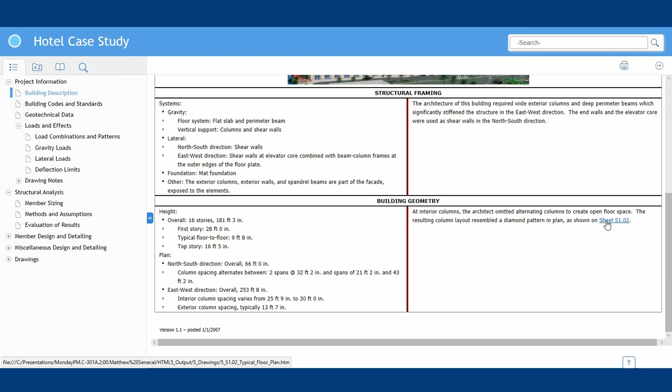And we did lots of nice links in here too. So if we're talking about building geometry right off and you wanted to get a good idea of it, it takes you right here to the floor plan. And to make this nice, you've got a floor plan, you can click on the plan and then it'll blow up and you can take a look around. So it's a nice little tool to help you quickly get around, to get a sense of the building as you're going through and visualizing the design, visualizing what's happening with this structure.

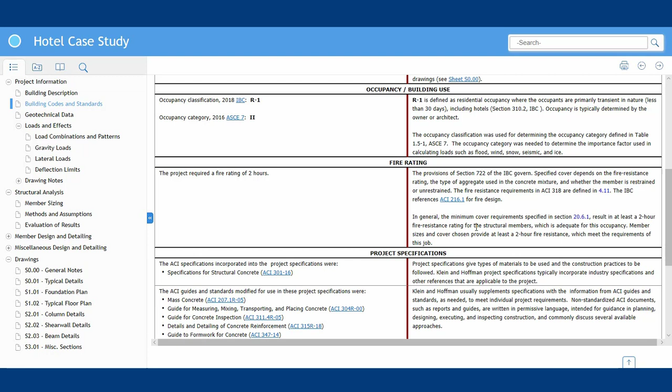So anyways, that's one thing you have to think about. The architect, by those occupancy ratings, has to come up with a fire rating. For this particular structure, a 2-hour fire rating was necessary. Well, inherently in ACI 318, you get about a 2-hour rating. Those are things that you don't learn, right? You kind of explore those things on your own. But it's good to crack open 216 every once in a while and see what cover gets you, so you get a feel for what just a natural design will give you when you approach a structure.

Once again, that's what this whole process was about. I don't get into too much project specifications in these. That's almost another whole topic, I could have had another 100 slides to get through job specifications, but it does help you along with drawing notes.

When I got started out there, I worked for really small firms, on really small buildings. I never wrote a set of project specifications until I went to another firm and started doing larger structures. Everything was notes on drawings, and that was just fine for small structures. It works really well.

ACI 301, which is the concrete specification we have here, is a reference spec. It's very simple to write a concrete spec on a set of drawing notes if you use the mandatory checklists in the back of that document.

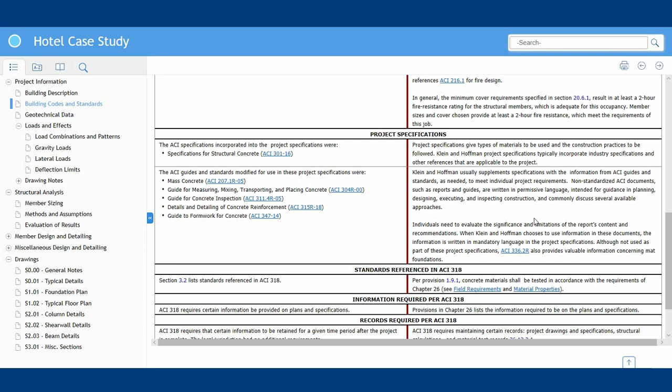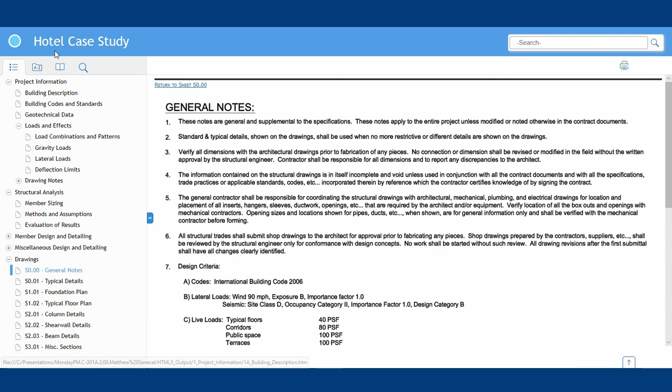Basically, most sets of notes that you'll see on a drawing—let me go on down here to general notes. Here's a notes sheet, we got some general notes. Let's see, we got concrete notes. Let me go back one. Got concrete notes. You see these little notes you put on drawings?

How did they get those notes? Where did those come from? Why are these so special? And why aren't they just in a set of project specifications?

Most places I ever worked, someone in the office was designated the concrete person, and they found that magic thing called ACI 301. They learned about checklists in the back of that reference specification, and they started answering those questions in the back of the document. As they answered those questions, they wrote them on the notes. That's pretty much how most people arrive at the notes on job drawings.

And then you'll have an architect that comes along and says, I need a set of project specs—would you do the material specs for me, please? And then that would be another seminar you need to go to.

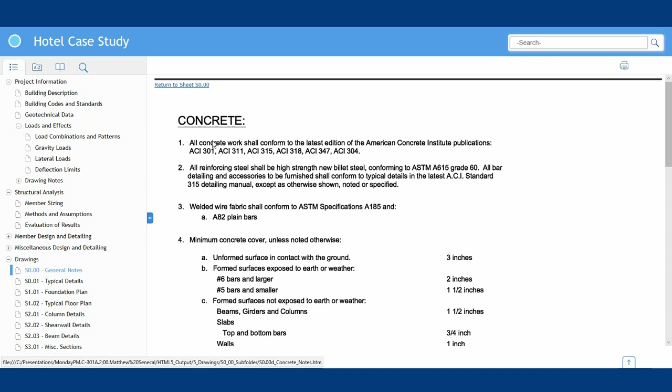Another thing you collect is geotechnical data. You need some of that information in order to complete your loads, to understand the analysis you're going to accomplish, so we have a little section on that.

We get into loads and effects, the load combinations, patterns. You'll start to see as we get to this point in the project, I put in little links or drop downs to ACI 318-14. 19's not out yet. I updated this from 318-05 to 14 because that was the last time I worked with this.

The structure was actually built under 318-05, but many of the requirements are the same, and I updated them, all except for wind. I had too many graphics in there that had to do with wind design, the numbers and stuff. But what's interesting about wind?

Young professionals, what happened between ASCE 7-05 and ASCE 7-10? Can anyone tell me? Yeah, ultimate load, right. So we went from 1.6 times the wind load to 1.0 times the wind load. You know what the difference is? 1.6.

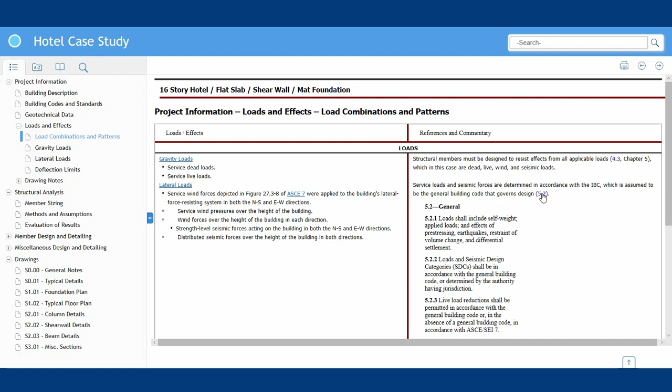There's no mystery, they didn't reformulate everything. They did provide a bit more information on lots of other things, other structures and things like that. They did do a lot of improvements, but the basic wind design is 1.6. So if you saw a service load design from the early 2000s, just multiply it by 1.6, and now you're at ultimate load, and you're good to go. That's the short version of many long wind things you'll go to.

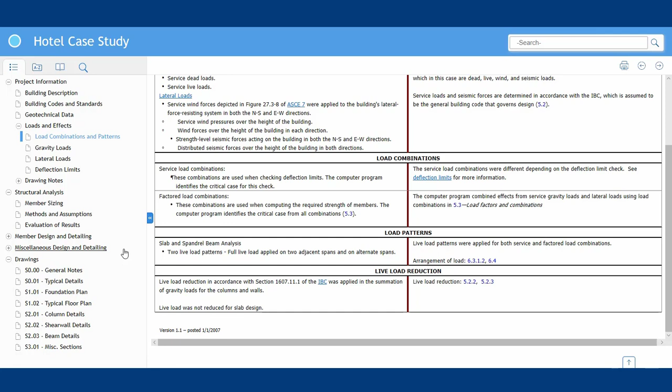So anyways, we talk about load combinations, patterns, how you move your live loads around—alternating live loads, two spans together, every other span, checkered span, on floors checkered, alternating live loads—that stuff is in here with a little information. You can pop down and read it, or have your 318 open and read along to see the full picture instead of just the individual requirements.

A lot of these code requirements—I'm just putting a little fear into you—had a lot of fluff in our equations because we were designing by hand not too long ago, or with very simple first order analysis matrix type designs. So when we were assembling the process in which we go to do design, we're basing that on these more simplistic methods of analysis.

We had some wiggle room when we designed a frame in one direction, then a frame in another way. We didn't have the full 3D effect before. But as time has gone along and we get more dependent on computers, and get closer to actual values in the column, we now do a full 3D analysis with a corner column. I get nervous sometimes that we're cutting it a little too close on our corner column designs. We have to really think about how close we're getting to the actual loads and values in the equations in ACI 318.

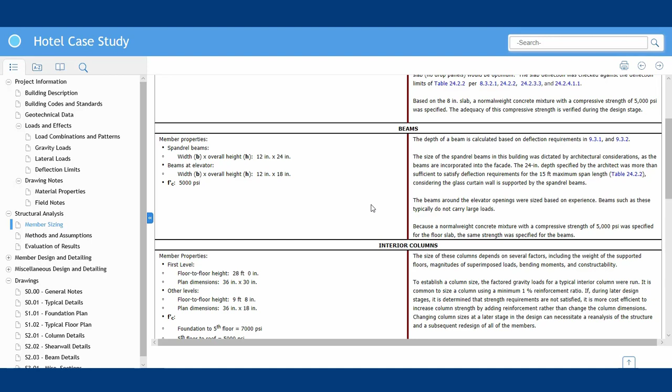It's getting better and better though, by the way. Those forms are getting more adjustable, more reusable. These are all things you start to pick up over time, and hopefully the more experienced engineers in the office help guide you along.

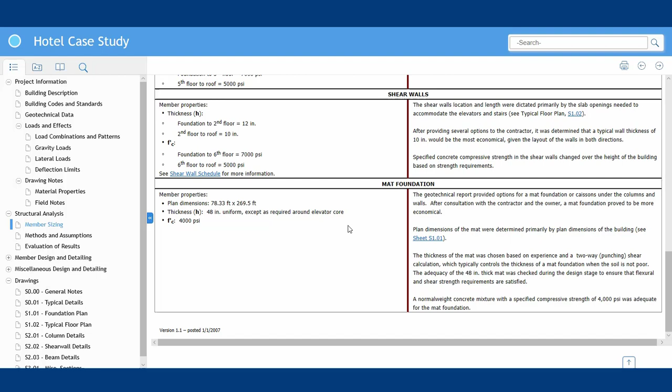But this page right here talks about initial member sizing, because we need initial member sizing to run our analysis. We need to put some sizes into our computer program. How do I arrive at those?

That's right here—they used a finite element analysis for this, and finite element analysis is addressed in 318.14. They put a little section in there saying yes, finite element is good for everything: first order analysis, second order analysis, nonlinear elastic analysis. But at least they're starting to talk about it.

What I hope over time is they start to provide us a little more guidance in the code, especially when it comes to things like flat plates, where we're collecting a lot of forces across a strip and getting super high stress concentrations, particularly at our columns or something like that. How do I normalize that? What happens if the stresses just seem oddly high?

How can I mitigate that? How can I feel comfortable that what I'm looking at makes sense—that I can just normalize, add up all those moments, divide, and get an average value? How can I do that? So hopefully we'll get a little more direction in our guides and in the code going forward. But at least we're now even saying that it exists, which has existed for a very long time.

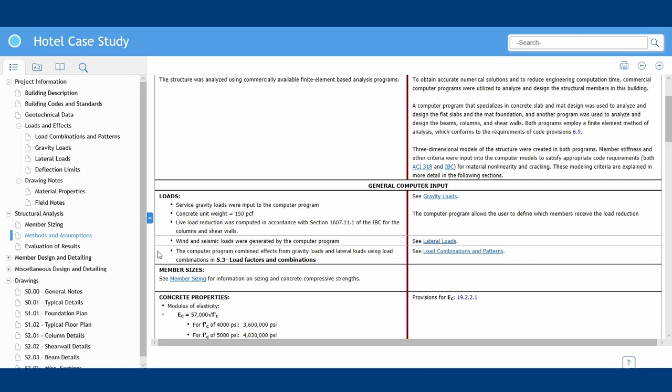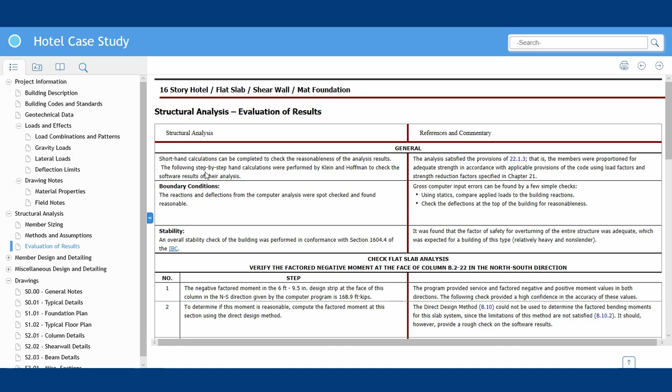We go along, and I was talking about evaluation of results, using Chapter 6 to evaluate your computer program. We have a whole section here called Evaluation of Results that does just that. So here we have this very odd floor plan—very long spans, very short spans, flat plate, columns in a diamond pattern. Let's see if I can show this quickly.

So in here, the computer program gave us 170 kip-feet. Then I just use the direct design method—I just ignore the fact that I don't meet its requirements. So it may not give me a safe design, but it should let me know whether or not my computer analysis is making sense. I might be just outside the values I'd normally get. I wouldn't use them for design, but I should be close to the values.

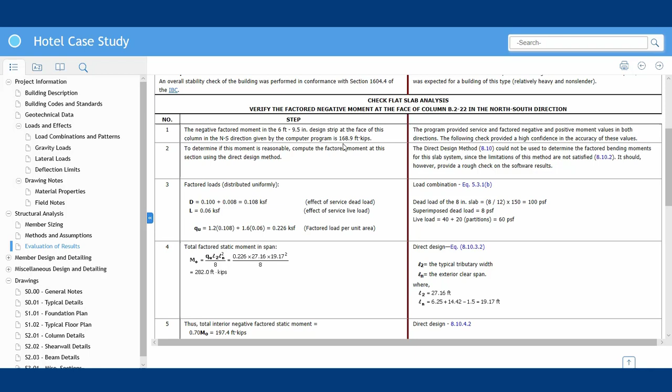As you come down here, you come up with 148 kip-feet. So 148 from my hand calc versus 170 from the computer. So I can say with some reasonableness that this odd thing I'm looking at with an FEM analysis is giving me something in the realm of possibility. So we have tools out there—these old tools are there for us, and they're in the code. You don't have to go that far to find them.

So then after we get through all this upfront stuff—and I spent a lot of time on it because that's the stuff you don't learn in school typically—there are some of you out there doing all this, and I applaud you, because you're preparing your students well if that's what they're wanting to do. But we're all wanting to do different things. This is specifically to get you into the world of building design.

So from here, we have member designs: the flat slab design, the spandrel beams, interior column, the shear wall design. For whatever reason, everyone seems to have a problem with designing walls. Not really sure why—I guess maybe because we just don't talk about it enough. But that seems to be the case, even when I go to general practitioners: how do you design that wall? They get very defensive.

Oh, okay, all right. So it's one of those funny things.

So we have examples in here how to design the shear wall, and we got the mat foundation as well. All of these are in here, and they follow a general format. Let's see here, we got the flat slab.

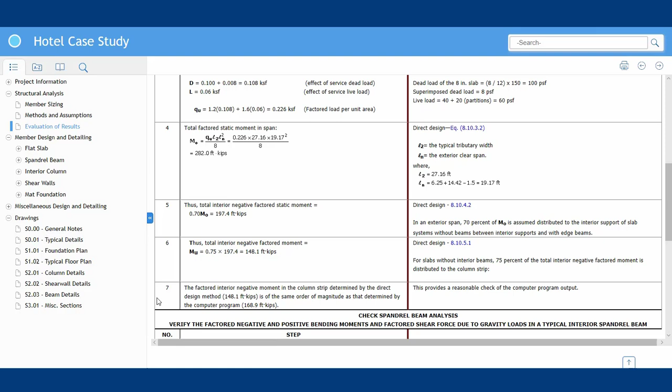We usually start out with flexural design, so let's pop into here and go through. Now, I don't take you through every calc unless it's an unusual calc, because you can go to your textbook to get the equation for designing a square beam, or a square section in a flat slab. So a lot of times we just give you the As that would be required, and take you down through the rest of the code to fill in all those little gaps that you might not have read about or learned about.

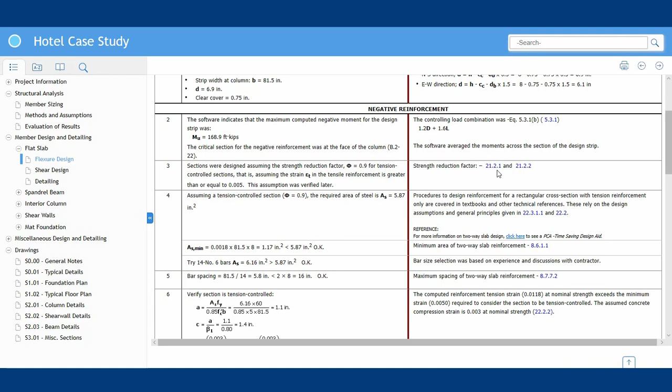But once again, that individual who designed this is taking you through their thought process as they design the negative moment reinforcement.

In this case, what a lot of people don't realize is, in a flat slab, you have the negative moment reinforcement, the positive moment reinforcement, and then we got this thing called the unbalanced moment. There's a little bit of moment right around that column, whereas it goes into the column as moment, but as it flows around the sides of the column, it transfers as shear right along the sides, like a spring. Think of a spring coming out the sides, right?

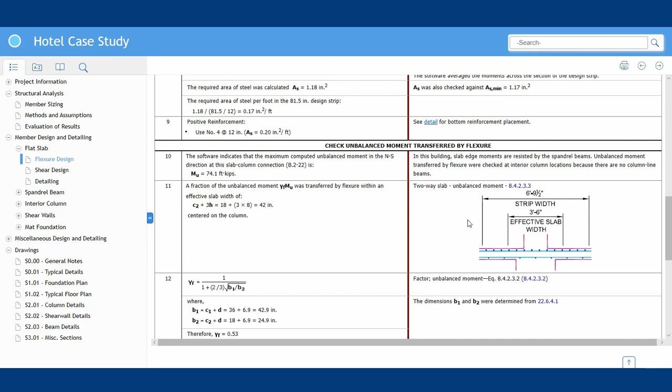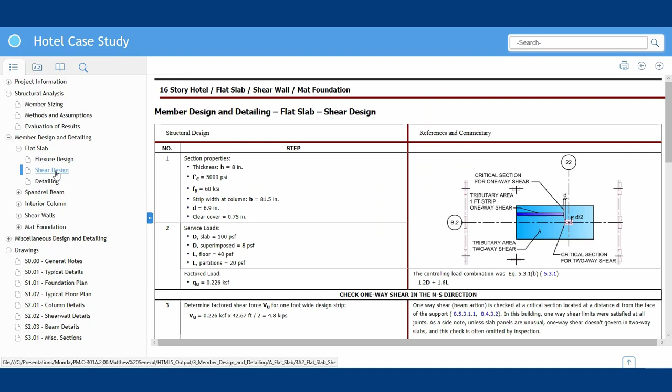So they've come up with some equations that say we need to concentrate on that little portion of the moment, and make sure we had enough steel for our general strip design right around the column, and then make sure the part that's transferred in shear is accounted for in shear. I think this example does a good job stepping you through that, showing what we mean in ways that maybe you might not have seen before.

Other little things I want to show you in here is we also have references. So if we saw a particularly good paper that really talks about that, we have a link to it. As students, I think you get access to most of these papers for free, I believe, like the structural journal, materials journal, and all those kind of things. So you can read these papers, and we selected these papers because they were good practical papers, not because they were highly theoretical.

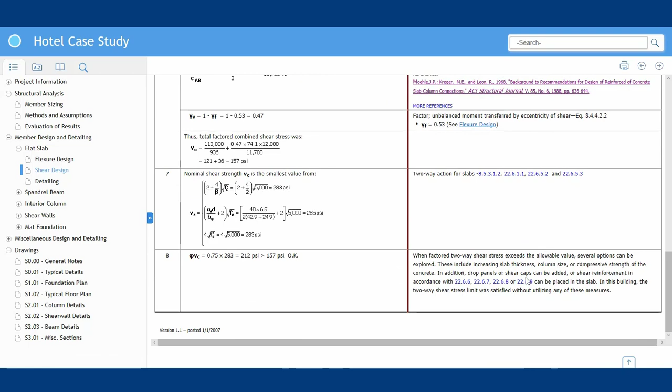So we come back, we have a few extra things like that in here that are nice and helpful, and then we go through the detailing, trying to understand how you go about the general thinking of a section and how you would detail it, and a little bit on plan. Then finally you can go to the actual sheet and see how, as we saw in the beginning, you would call it out on the actual drawing. So how you might conceptualize the detailing as you're going along, and then how you might actually present it on a set of drawings. That's all provided for you in here.

Let's go back to the Spandrel Beam. The reason why we chose the Spandrel Beam is because it has torsion. I wanted to take you through a little bit of torsion, how that actually plays out in a real life design, and how, as you'll see in this case, you can't ignore torsion.

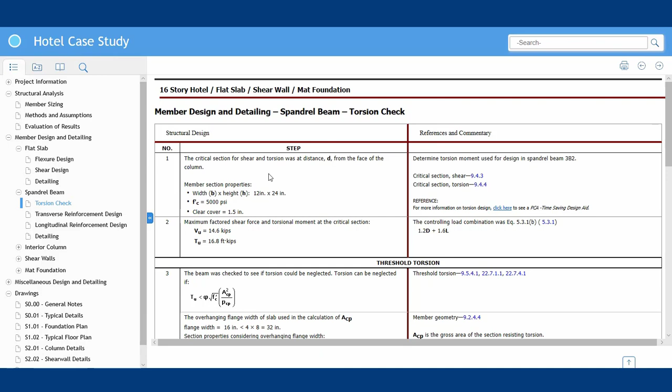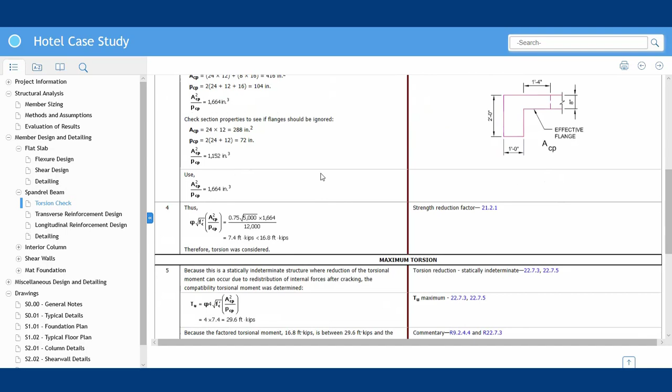There's a thing called threshold torsion. If you're below it, you can ignore it. You can't ignore it in this case. So we were trying to find buildings that pushed you a little bit, right? Problems where you think, oh, I was hoping it went away. It didn't go away, right? And so now we have to deal with it. And this, how did that individual tackle that problem?

Right? And so then you got transverse, longitudinal detailing. You start to see a pattern there, right?

Interior column, pretty simple stuff here. I mean, columns are, we just use our interaction diagrams. I think one thing that is said in here is, once I usually pick a size, it's largely dictated by the architect for columns. And they're usually these days pretty good, I think, at picking an initial size.

You might have to adjust it slightly, but you usually start at about 1% steel, the minimum, right? That's where we like to start, and then we go up from there, and once you start getting past 2%, which is discussed in here, you might want to start rethinking about how that column is designed. So that thought process is in this overall case study.

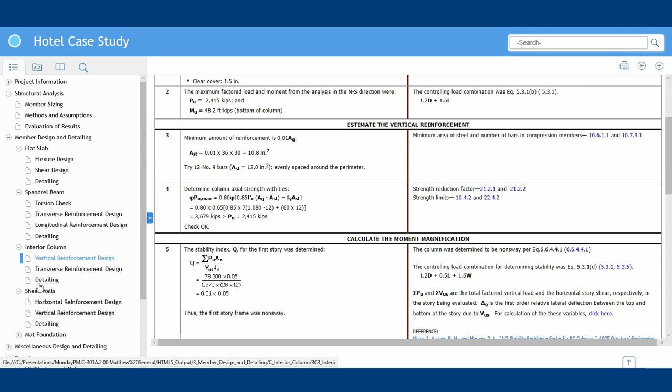Shear walls. Once again, shear walls aren't really all that complicated. I think once you put in the minimum horizontal and vertical steel, basically you're checking it as a column. There's the magic trick to it. But also realize walls are generally lightly loaded for compression, so you generally don't have to have confinement steel.

Now, if we're talking about a large shear wall in plane bending, we're going to have possibly boundary elements on the outside, and we're designing those elements as columns. But for most shear walls out there, it's a pretty straightforward design. We put in our minimum vertical and horizontal reinforcement.

We do a quick check on the combined stresses as a column, and we're done. And for this particular structure, that's true, and they kind of take you through that thought process.

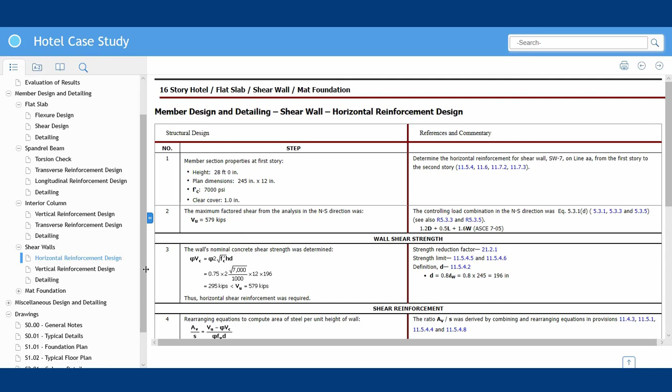And the mat foundation - how is the mat foundation sized? It's actually talked about earlier in sizing. It's really easy to pour a lot of concrete in the ground, and typically you don't need a form. So we're not really wanting to put any shear reinforcement to a mat foundation, and that's pretty much what you come about learning about mat foundations.

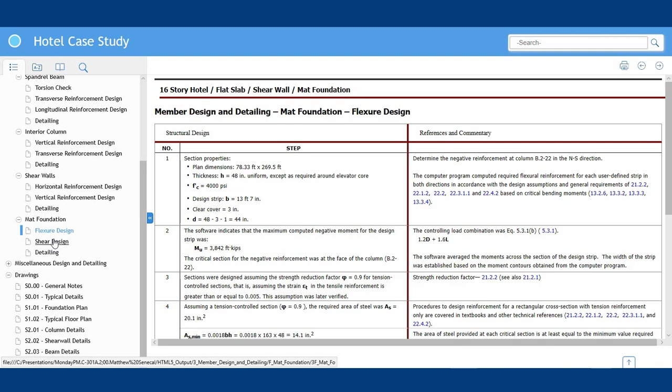You make them thicker and thicker and thicker until all I have to do is put in top and bottom reinforcement, and you put in the minimum reinforcement. It's 4 foot thick, and you're putting in number 9s at 6 inches. So there is a little economics you have to think about before you just rush off and make that foundation as thick as possible. But anyways, so I have an example in there.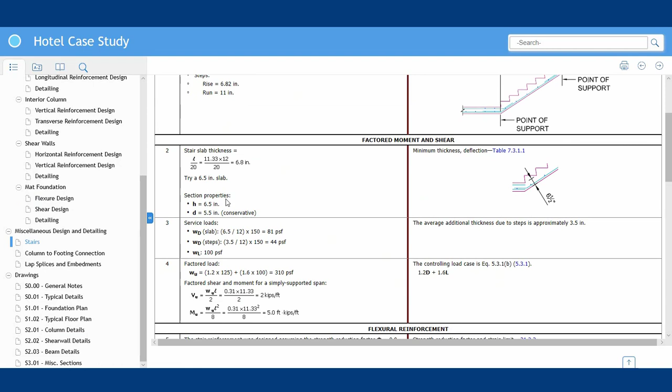And then just as for fun, you know, some people are always confused about how do I approach like a stair design. So we threw one of those in there just to kind of show this is how I would do it, because you're just not going to find it very many places.

Column to footing details - there's a little bit more that's in the code, so this was kind of to make you aware there's extra code requirements for certain types of connections. And then we ended up doing a little on splices and embedments.

So most firms, you're doing all this design, and you're showing your floors, and maybe you're putting your reinforcement in the floors and showing it, and then you got all these schedules for your beams, for your columns, for your walls. And then you have this general sheet, which is general details, small walls. And one thing that 318 says is you have to state where all your splices are and the length of those splices. And if you're going to do that for every set of drawings, you'd never get done drawing.

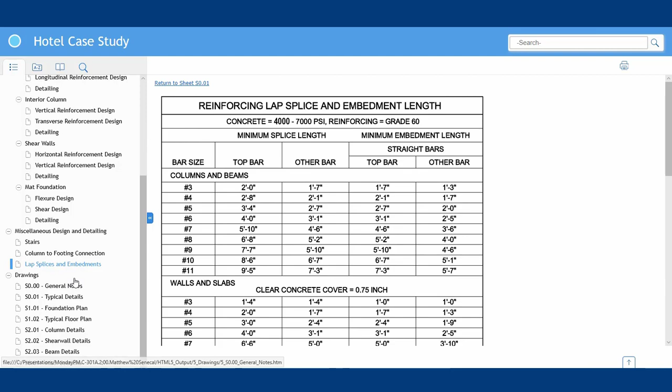So most of us out there end up making some sort of splice and embedment length table. There's all sorts of them out there. CRSI has a handful of different ones, but we kind of took you through how you might go about building one of those tables, okay.

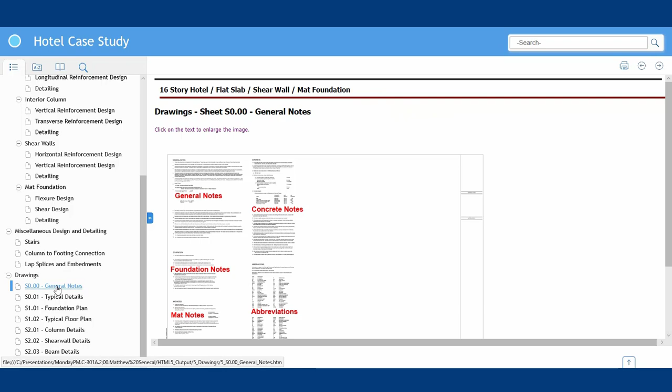So just a bunch of little bells and whistles out there, why this, why that, where does that come from, how do I calculate that. And then, as we get along in here, we have the drawings down through here, and this is one of the first ones we did, so we decided to have these as pop-outs, that you could do this.

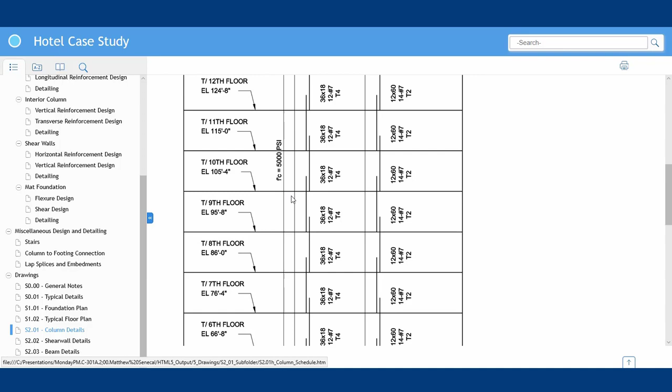In one other folder, we actually have the full-size PDFs in there, so if you have a full-size printer, you can open up that file and print them out if that floats your boat. But anyways, shear wall details - door opening, typical reinforcement around an opening, the wall schedule, what is a wall schedule, how did they put theirs together. Kind of gives you a feel for how to put together a set of drawings, and with a couple clicks, it kind of jumps right around and all that kind of stuff.

So that's the gist of it. I think I'm just going to stop there, if that's all right. And I'd like to answer questions or just talk about situations of getting out there, any concerns you have as a student, any problems you might have gone out there as a young professional.

Was it as scary? I mean, for me, it was really sink or swim. I was really surprised. The first job I got was a masonry structure, and we never even talked about masonry in school. And they gave me the code and said, I'll give you 3 days to learn the code and 2 days to design the building. And they said, and we've given you 4 days too many.

It was literally a sweatshop. They didn't have an air conditioner. One day I went in and worked in my t-shirt and I was sweating on the drawings. But I loved the place. I really did. I really enjoyed that, all that.